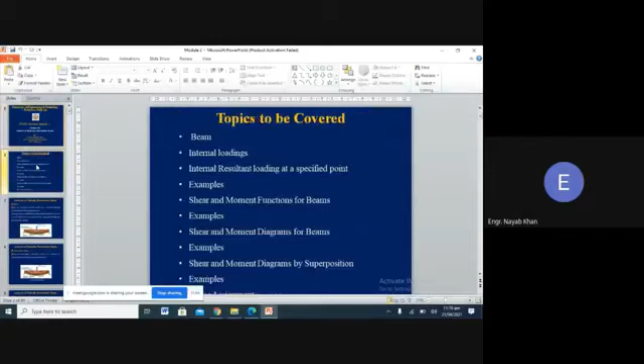Today we will discuss the internal loadings, the internal resultant loading at a specified point. This means in today's lecture we will be discussing beams, how we will calculate the internal loadings, and how we will draw the shear force and bending moment diagrams of beams. And then in today's lecture I'll also be giving you a home assignment.

So first of all we will define beams. What are beams? Beams are actually structural members. If we start from the beginning, this is a structural member. The next thing is it is a structural member which carries transverse loading, meaning perpendicular loadings to the longitudinal axis.

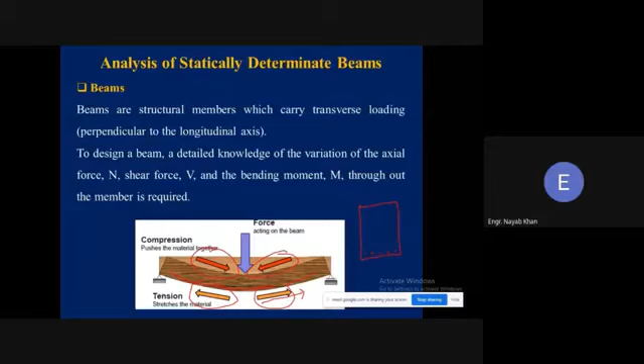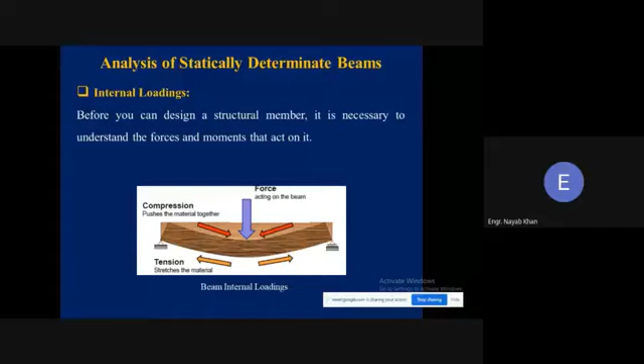This is what I have explained in the previous slides as well. So before designing a structural member, it is necessary to understand the forces and the moments that come over it, and the effects of those forces and moments.

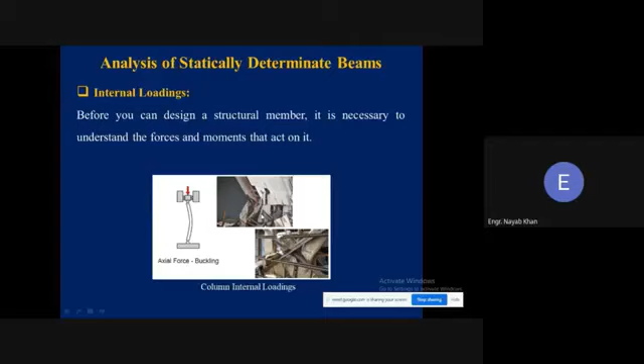And if let's suppose we have a short column, then buckling cannot occur in a short column. You will discuss this in coming semesters as well, that in short columns, the column will directly get crushed.

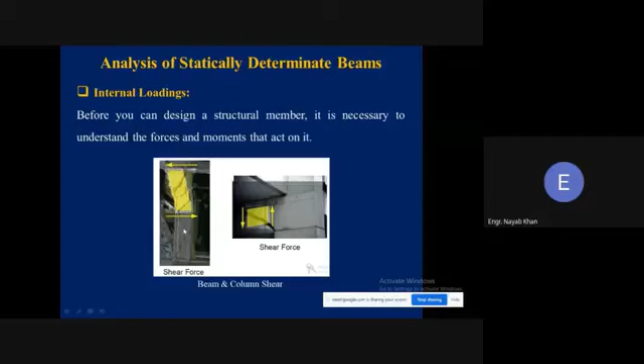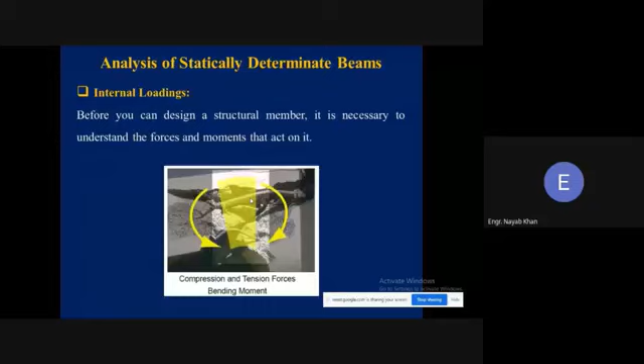So understanding these three, that is the shear, the normal force and the bending moment effect, is necessary while designing a structure. And in an analysis, what we actually do is calculate these effects in a structure.

So the internal loading at a specified point. If let's suppose we talk about internal loading at one point, then we can calculate that internal loading at this one point using the method of sections. We use the method of sections to calculate these effects.

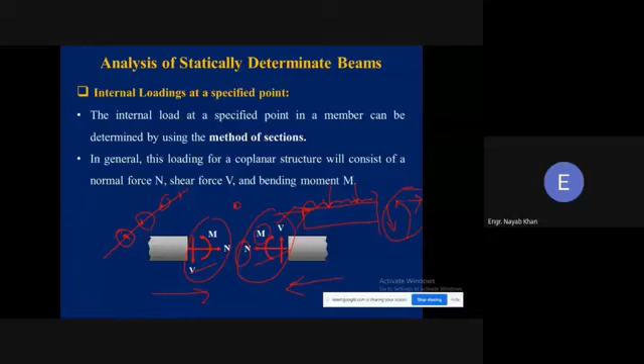So we use some sign convention. On the left hand face of the cut member, the normal force acts to the right, the internal shear force acts downward, and the moment acts counterclockwise. Suppose I am having a beam like this, and if I want to cut the beam at this location and analyze it from here, we'll throw away this portion and just analyze this one.

Now if we are throwing this portion and want to calculate the internal forces from this side instead, our sign convention will be different: the upward shear will be taken as positive, the clockwise moment will be taken as positive, and similarly the normal force acting to the left will be taken as positive. So this is the sign convention that we'll be using—this one and this one.

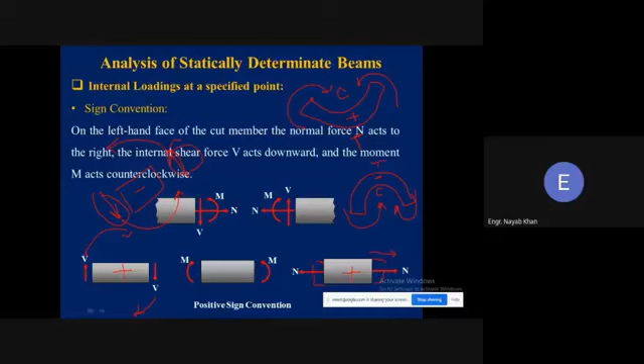Next we'll move toward the procedure for calculating the internal loading at a specified point. Let me summarize: first, we calculate the reactions at the supports. Then, once we've calculated the support reactions, we take a cut or section at the location where we need to calculate the internal loadings. There, according to our positive sign convention, we draw the shear force, moment, and normal force.

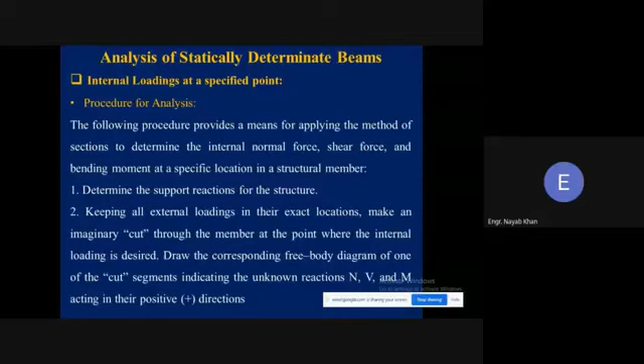We don't consider axial forces and normal forces in beams because the beam member is mostly subjected to loading in a perpendicular direction. Axial or normal loading mostly doesn't occur in beams, so that's why in a beam we usually neglect or ignore the axial effects, since the loading on the beam is actually perpendicular. So the reactions will also be perpendicular, and the normal forces as internal actions will also come out as perpendicular along with moment. That's why we only consider the internal shear and moment in case of beams.

So let's solve this example. First, we will calculate the reaction at the supports level, and similarly we will be converting this load into a point load. As it is a triangular load acting over 18 feet of length, we calculate the area of a triangle as b into h by 2.

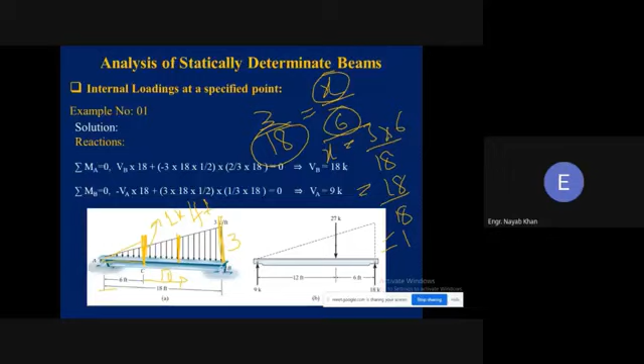Now as we are having a 6 feet portion, so for 6 feet, when we calculated using similarity of triangle, what did we get? We got 1 kip per foot loading. So we can utilize this 1 kip per foot load over here. Now you can see what we'll be doing.

We will be taking the summation of forces in the y direction equal to 0. We have 3 forces: this one, this one, and this one. Let's suppose upward forces are taken as positive, this is our sign convention. So 9 in the upward direction, the downward intensity we convert into load and take as minus, 1 into 6 divided by 2, and the downward shear VC, this will be equal to 0.

So from here we can calculate VC as 9 minus 3 equal to VC. So VC comes out to be 6 kip. So at point C, the shear force we have, how much is it? That is 6 kip.

Now we can calculate the moment at this location, the moment at the cut section. Let's suppose we are taking summation of moment at the cut equal to 0, and let's assume that the counterclockwise moments are taken as positive.

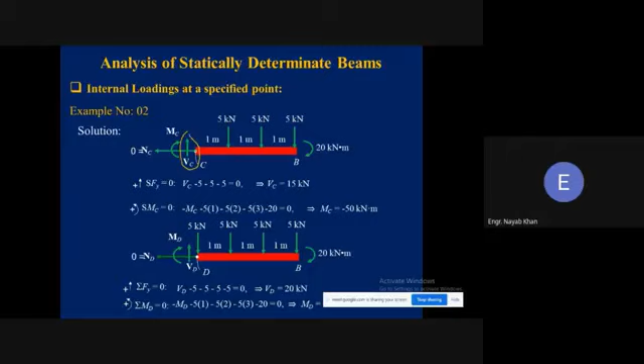Now you can see we have how many loadings? We have VC in an upward direction, positive convention के मुताबिक, 5 kilonewton in a downward direction, 5 kilonewton, 5 kilonewton forces in a downward direction.

So we can take summation of forces in the y direction equal to 0, taking upward forces as positive. So VC positive minus 5 minus 5 minus 5 equal to 0. So VC comes out to be 15 kilonewton at point C. So the shear at point C is 15 kilonewton.

Similarly, we can calculate the moment at point C by taking the moment at the cut section equal to 0. We assume that counterclockwise moment is positive. So the applied MC is negative now because it is clockwise. Our assumption is that we'll be taking counterclockwise moment as positive.

This force is also causing a clockwise moment, and this force is also causing a clockwise moment. How much will be the moment caused due to this force? 5 into 1. How much will be the moment caused by this force times this perpendicular distance, which is 2 meter. Similarly, the moment due to this will be 5 into 3. And this applied moment of 20 kilonewton. So we get MC as minus 50.

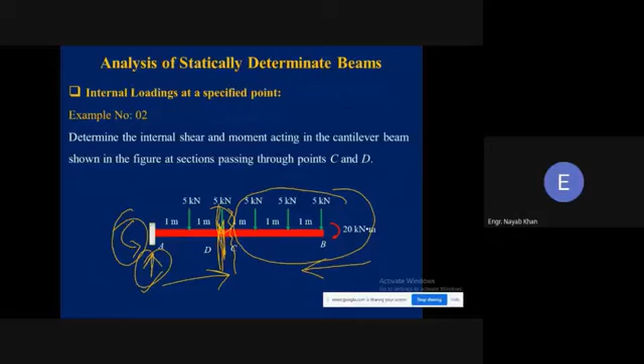And similarly you can do it for section D as well. But what will we have at section D? How many loadings will come at section D? At section D we will be having, section D is at this location. At this location there is a load applied at point D of 5 kilonewton. This load will not cause any moment because the line of action of this point and point D is the same, but this will contribute to the shear.

So in shear force we will have this load, this load, this load and this load. And similarly we can calculate the moment because of this load, this load, this load, and summing up this one moment with that. Is this clear? Can you do it?

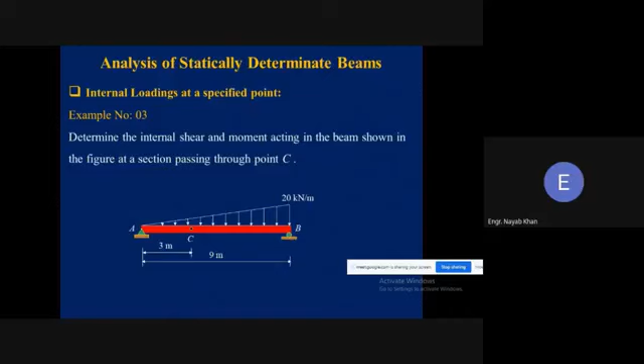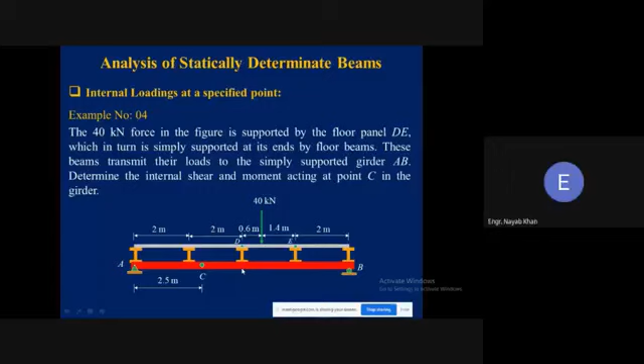So now we will be doing this thing. As you can see over here, we can calculate the reactions at the beam level due to this 40 kilonewton load acting over here. You can calculate, let's call it RD, as this is point D and this is point E. So first calculate the reaction due to these loads, 1.4 meter.

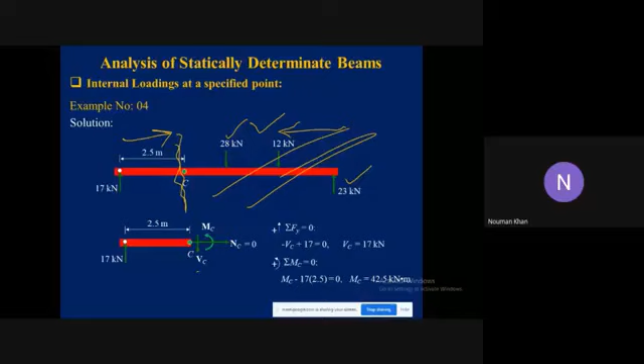So let's move toward the shear and moment functions. How are we going to derive the shear?

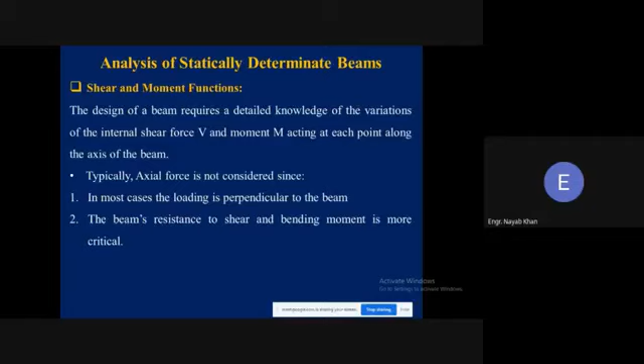The design of beams requires a detailed knowledge of the variation of internal shear and bending moment. This is a very important requirement in design. Typically what we'll be doing is calculating the shear and moment function for any structure, and accordingly we will design our structure. So the shear or moment diagram, or the variation of shear and moment with respect to the length, is important. We will be doing this directly as well as by the method of sections.

The variation of shear or moment can be written as a function of position x. We will give x different values and then we'll be able to calculate the shear and moment at these locations. X will simply be a distance.

In general, the internal shear and moment function will be discontinuous, or their slopes will be discontinuous, at the points where the type or magnitude of the distributed load is changing.

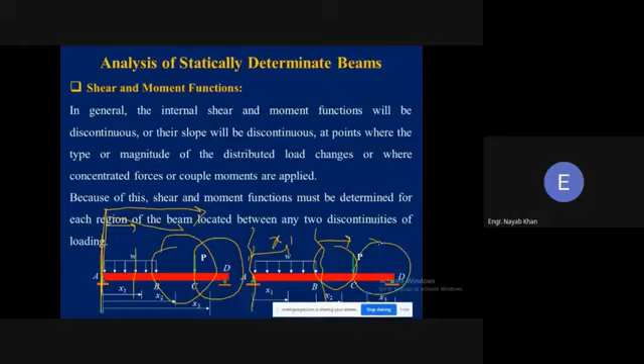So it depends on you. The coordinates x1 and x2 will be used to describe the variation of the moment and shear throughout the length of the beam.

So let's discuss this example. Determine the shear and moment in the beam shown in the figure as a function of x.

You are given with one x, and you are required to calculate the equation of the shear and moment at this location in terms of x. This is exactly similar to what we have done before.

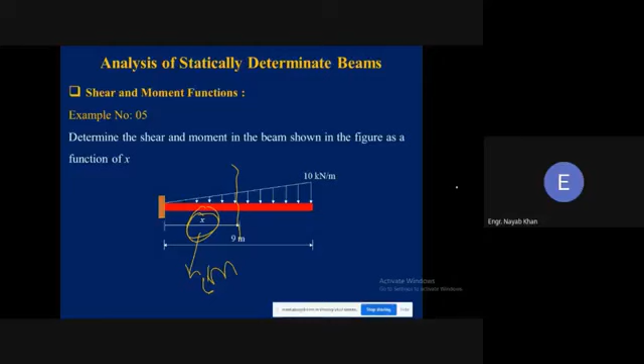We will be taking one section at this cantilever portion because the loading condition is the same throughout the beam. So first we will calculate the reactions in the same way, using summation of moments and summation of forces. After calculating the reactions, we will take this section.

When we take this section, we will have to calculate the shear and moment in terms of x. Let's suppose we take summation of forces in the y direction. You can see this distance is x, where we are going to take the section, and the total distance is 9 meters.

So if there is a 10 kilonewton intensity over a 9 meter distance, then there will be a certain intensity over an x meter distance. So here the intensity of the loading will be 10x divided by 9. This is actually the loading, 10x divided by 9, and this x is the distance.

So 10x divided by 9 is the load, multiplied with the distance x divided by 2, which is actually the area, the converted area. Let me explain it again.

At a distance x, this will be 10x divided by 9 from similarity of triangles. So this one is 10x by 9, and this one is x. So the area of this will be 1 by 2 of 10x by 9 into x. And its perpendicular distance will be x by 3 from this location and 2x by 3 from this location. So now you are able to calculate the shear force and the moment at this location in terms of x.

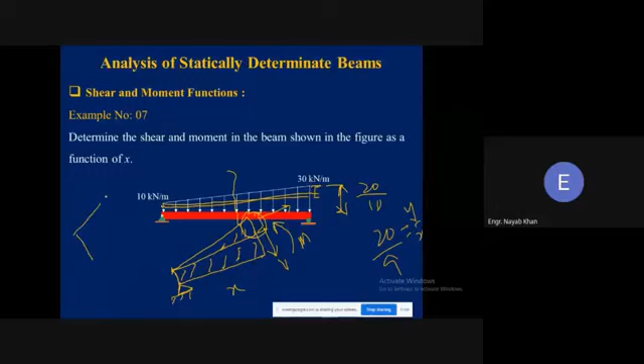So suppose I am having a 20 kilonewton intensity over a 9 meter distance. How much will be the intensity at x meter distance? This will be 20 by 9x. So the intensity of this loading is 20 divided by 9x. And the intensity of this other loading will be 10 into x - sorry, this will be the same 10 throughout.

So if I calculate the point load effect of these: this will be 20 divided by 9 into x, by 2 - that is, 1 by 2 of 20 by 9 into x into x. This comes out to be 10x squared divided by 9, and this loading will act at a distance of 2x by 3. And if I calculate the resultant force due to the other loading, this will simply be 10 into x, and this will occur at a distance of x by 2.

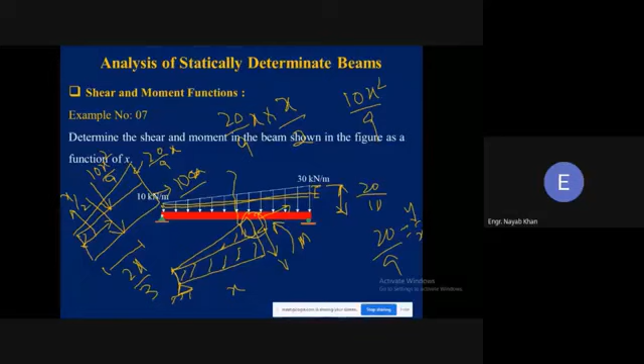So the loading is now clear. Now we can calculate the reaction at the support, the internal loading - summation of forces in the y direction. So we have this force in the y direction, that is 75. We have this force, that is 10x, and we have this force at this location. So the shear in terms of x comes out to be this one.

And hence we can calculate the moment at this location as well: that is 75 into x, since the perpendicular distance of 75 is x from this location, minus 10 into x by 2, plus this loading which I already calculated as 10x squared by 9, and this 10x squared divided by 9 will act at a distance of x by 3 from here.

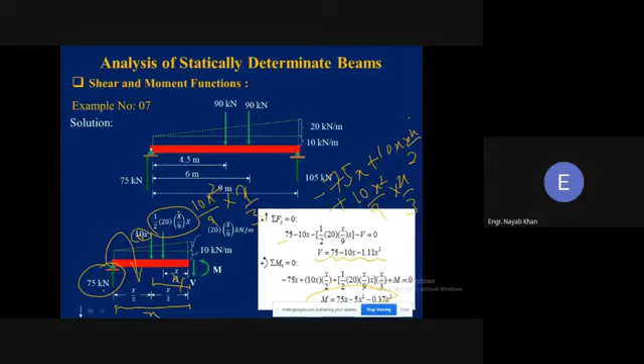75x is counterclockwise, so let's take it as negative - clockwise, sorry - minus, plus 10 into x by 2, and plus 10x squared divided by 9 into x by 3. This will give you the equation of moment at this point at a distance x. So by giving different values of x, you can calculate the shear and moment values.

Now how to draw the shear and moment diagrams for a beam?

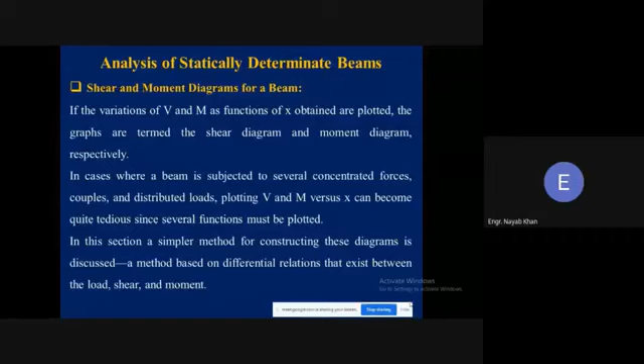So let's discuss this. Let me give you an overview of the shear and moment diagram for a beam. What will we do? We derived equations in terms of x for the shear and moment diagram. We will put values into those equations and calculate the different values of shear and moment, and then plot those values accordingly to get the shear and moment diagram.

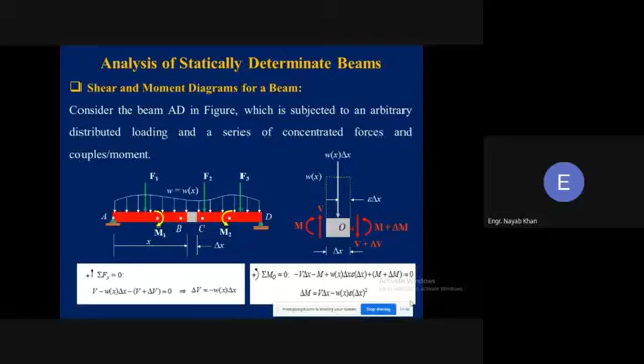Let me give an overview of what shear force is. Shear force is actually related to loading, the variation of loading, the rate of change of loading. So we can call the slope of a shear diagram as the intensity of the distributed load or any load over the beam.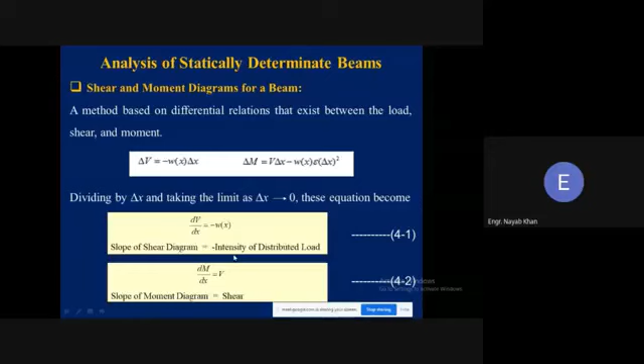So simply if we add up or subtract the loading, and if we move throughout the length, we will get a shear diagram for this. And if we calculate the areas of the shear diagram, we will get the moment. So area of the distributed load or any load is shear, and area of the shear is moment. So this is something relevant to each other. Change in the shear will be equal to the area under the distributed loading diagram.

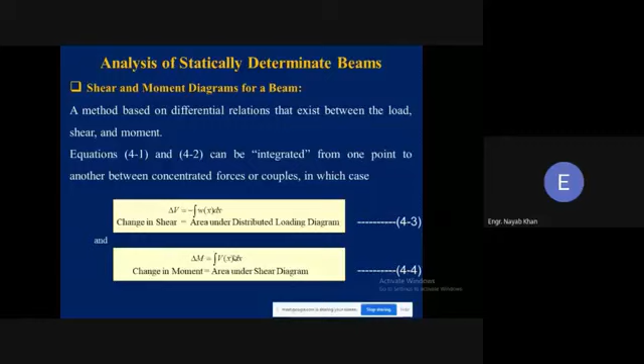When we explain the examples now, you will understand this concept - how shear is actually an area. Then similarly, change in the moment will be equal to the area under the shear diagram.

So let's suppose if a force F acts downward on a beam, delta V is negative, so the shear diagram will jump downward. So if your loading is downward, shear will also go downward.

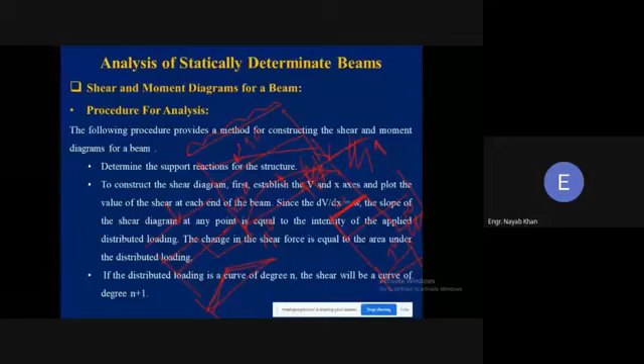So if a distributed loading is a curve of degree n, the shear will be a curve of degree n plus 1, and similarly for the moment: if your shear diagram is a curve of degree n, your moment will be a curve of degree n plus 1. So shear is related to the loading and moment is related to the shear forces.

So draw the shear force and bending moment diagram of the following beam. You can calculate the reactions for this beam, but since it is symmetric, I can take this as P and this as P. Now I will be drawing the shear and moment diagram.

The overall steps are explained over here. Let me do it directly, and you can then see the steps.

So this is the beam, and the beam is subjected to P and P, and these are the reaction forces.

Now what will be the procedure? You will be taking x at this location, x at this location, and x at this location. You will be putting different values of these lengths, and calculating the shear at this point, a shear at this point, and a shear at this point. Four values of shear you will be picking from these equations which you have written in terms of x.

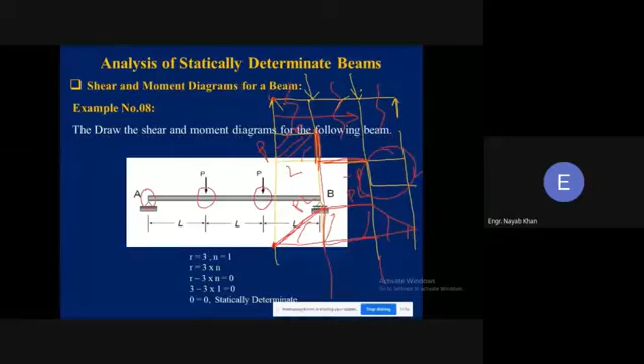Or you can do it using the same X distances, taking different sections over here, over here, over here, calculating the values of shear and moment at each location, and plotting these values, you will get the same diagram. This is a very easy example of drawing the shear force and bending moment diagram.

So the shape of the shear force and bending moment diagram will vary for different loadings. You can see like this, and you will experience this in the examples as well, so no need of wasting time on this.

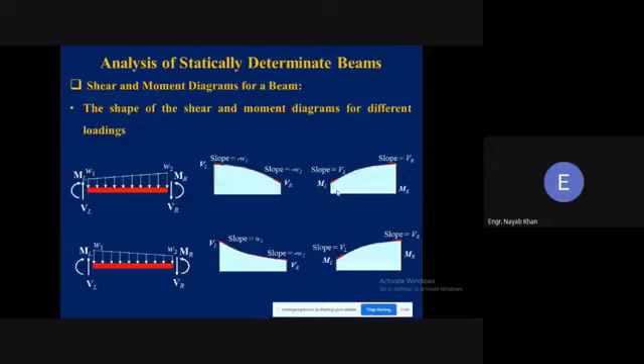So draw the shear and moment diagram for each of the beams shown in the figure. Anyone who can draw the shear and moment diagram for the first cantilever beam?

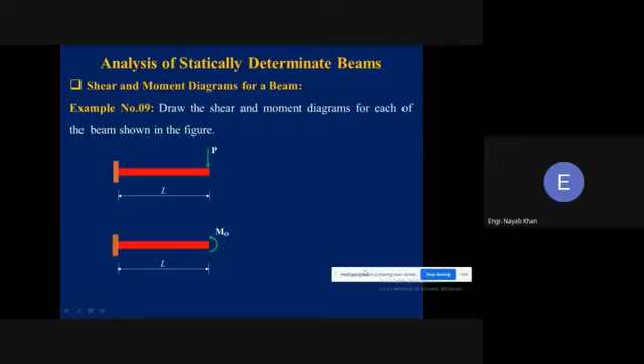I may ask any one of you to tell me how the diagram will be made. Is it done? Done, okay. So tell me how you made it. I made it ma'am.

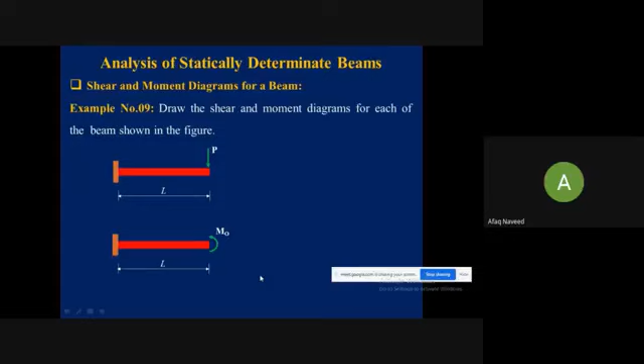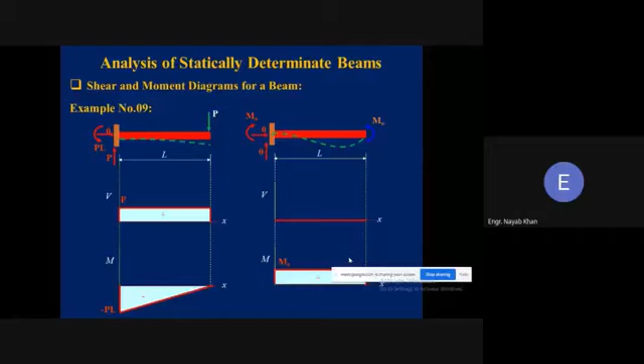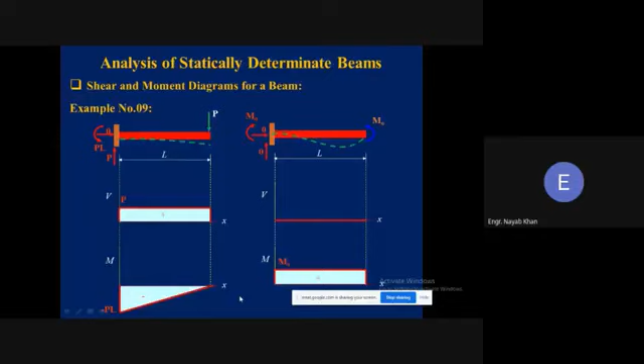Yes ma'am, okay, so this is some hands-on experience on these things. You will learn it with time, as we have already learned how to draw the shear and moment diagram. Practice these things, and let's explain example number 1.

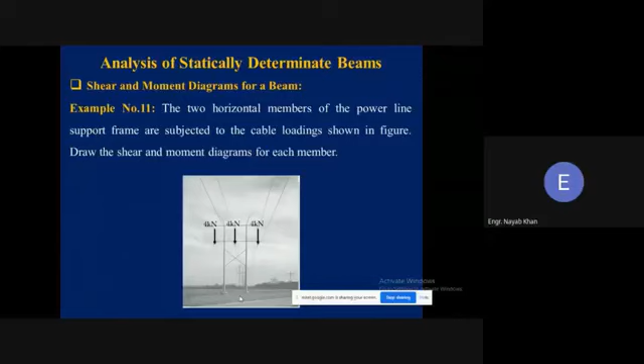In example number 11, the two horizontal members of a power line support frame are subjected to the cable loading. You can see 3 cable loadings, 4 kilonewtons on this tower, so draw the shear and moment diagram for each member. You can see over here you have 2 supports.

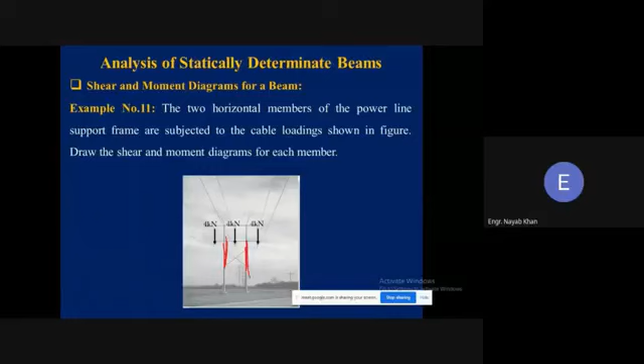You have a support over here and a support over here, and you have loading at this location, this location, this location. So you can calculate the reaction at the supports, and that will come out to be 6 kilonewton and 6 kilonewton.

Now you can use the same procedure as I already explained. Take an x at this location, x at this location, x at this location, x at this location. Calculate the shear and moment values at x is equal to 0, and at x is equal to 1.5.

Similarly, for this section, as this is x2, calculate for x2 is equal to 0 and x2 is equal to 1.5. Similarly, for the CD portion, x3, calculate the value for x3 is equal to 0 and x3 is equal to 1.5, and similar goes for x4. So you will get the shear and moment values at each location.

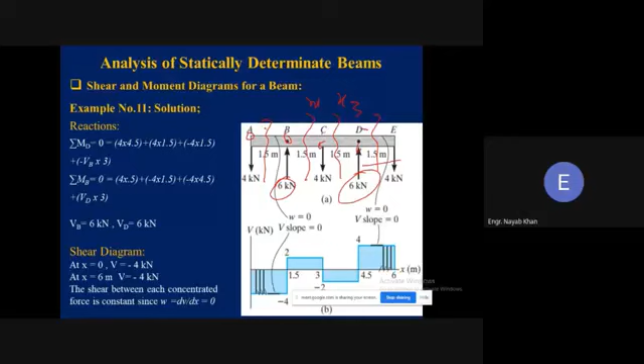Then what you will be doing, you will be drawing a line from each loading location, and you will be plotting your values.

If I do it directly, you can see over here I have a 4 kilonewton load acting downward, so it's a negative force, that will come downward from the x line. From here to here I have no loading, so the shear diagram will be like this.

From here I get a 6 kilonewton. So minus 4 plus 6 will give me what? Add all the forces from here to here. Minus 4 plus 6 will give me 2. So positive 2, I will move upward up to 2 kilonewton.

Then from here to here I have no loading. So add all the forces from here to here, that is minus 4 plus 6, and a downward force of minus 4. So 2 minus 4 will give me minus 2. Move downward. Similarly, no loading from here to here.

Now minus 2 plus 6, you will get 4, and you have no loading at this location. So what will come? The 4 will just move the same way, and minus 4. So this is your shear diagram.

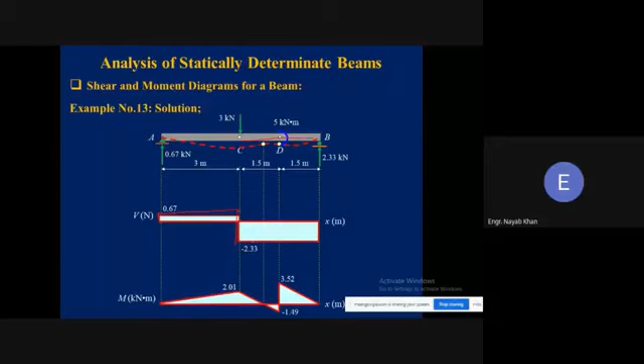That comes out to be 0.67 and 2.33. Now, 0.67 upward, there is no loading over here, then a 3 kilonewton load acting downward. So 0.67 minus 3 will give you minus 2.33. So there is no loading over here. There is a movement, but that will be incorporated in the moment diagram, not in the shear diagram.

Shear is just related to the loading. So minus 2.33, and this will be an upward load of plus 2.33. So the shear force diagram is like this. The moment diagram of this figure, the moment here is 0. So here the moment is 0. Here the moment will be the area of the shear diagram, 0.67 multiply 3. This comes out to be 2.01.

2.01, then what will you be doing? You will be calculating this area, which is minus 2.33 multiply 1.5. So 2.01 positive minus 2.33 multiply 1.5. This will give you minus 1.49.

So minus 1.49. But at this location, you can see you already have an applied 5 kilonewton meter moment. So the clockwise moment at this location, what you will be doing, you will be adding that. You can see this is a clockwise moment, so add this to minus 1.49.

So minus 1.49 plus 5, this will give you 3.52, and then calculate the area of this: minus 2.33 multiply 1.5. Subtract it from over here, and you will get 0. So you will have to incorporate the moments in moments and loads in loads. A clockwise moment will be added if the already applied load is clockwise, so you will have to add it to your answer.

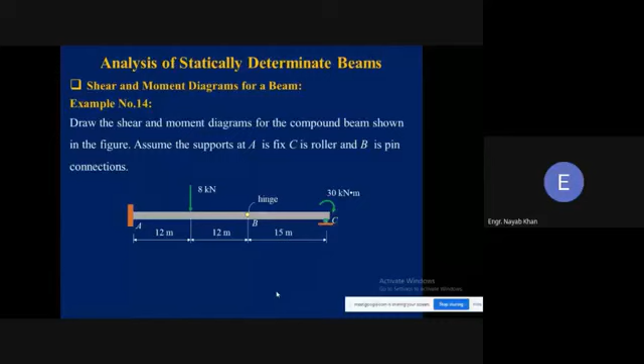If you, let's suppose we have an applied moment of 48 kilonewton and 30 kilonewton, first we'll have to draw its shear force diagram. How we will be drawing it? A shear force diagram of this: a 6 kilonewton load upward, no loading at this location, so come straight.

And an 8 kilonewton load downward, so 6 minus 8 gives minus 2, come straight, and there is no loading above. Then you have a 2 kilonewton load, so minus 2 plus 2 will give you 0. So this is the shear force diagram.

A moment diagram, I already told you a curvature like this, if a moment can cause curvature like this, this is a negative moment. So you can see over here the 48 kilonewton is a negative moment. So draw it downward, a 48 kilonewton downward at this location. Now add with this minus 48 kilonewton this area, 6 multiply 12.

So minus 48 plus 6 multiply 12, this will give you 24, positive 24, so move up. Now add this area to it: minus 2 multiply 12, so 24 minus 24. So the calculations are correct, the reactions are correct, the shear diagram is correct because we are getting a zero moment at the internal hinge.

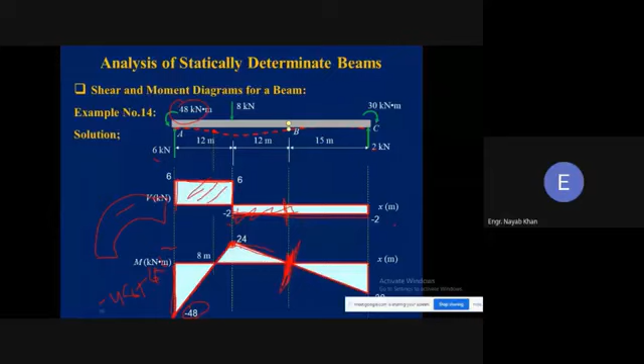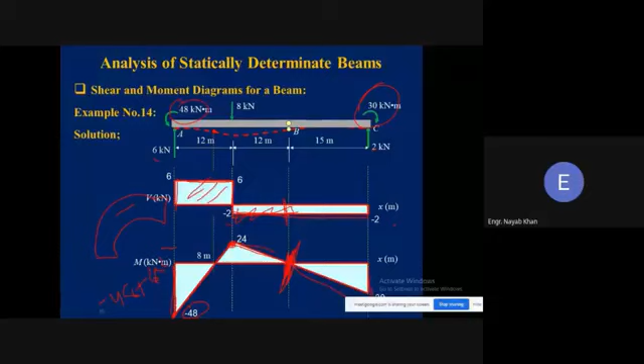Then move downward and then another applied moment of 30 kilonewton. So this is the check that you can see that your answer is correct: if there is any internal hinge, and if you are getting a moment at that internal hinge equal to 0, then you should understand that your shear force and bending moment diagram is correct. Similarly, you can draw the shear force and bending moment diagram for such type of loading as well.

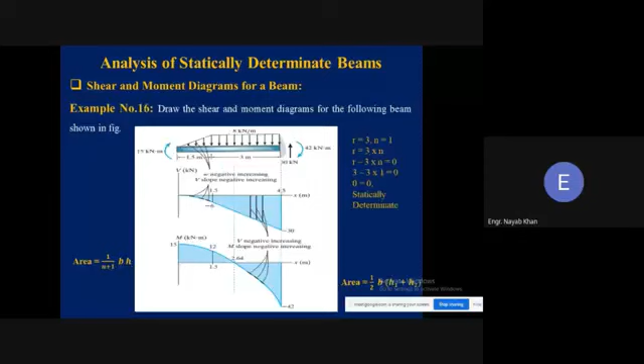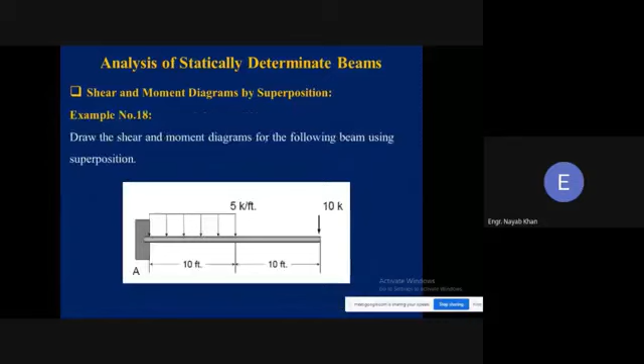So just have a look at this. Similarly, a shear force and bending moment diagram for such type of loading as well. Here you can see, and now you can draw the shear force and bending moment diagram using superposition as well.

Superposition means, let's suppose in example number 18, you have a beam and you are required to draw the shear force and bending moment diagram. If drawing it directly is not clear to you, you can draw it separately and then combine it.

Similarly, you can see the beam AB has two types of loading: point loading and distributed loading. So first draw a shear force diagram for the distributed loading, calculate the reaction at these supports, and draw the shear force and bending moment diagram for the distributed loading.

The shear force diagram will be like this, and similarly draw a shear force diagram for the 10 kip load, which will transfer over here as a 10 kip. So this will be the shear force diagram for this. Now combine both diagrams to give you the shear force and bending moment diagram collectively for the beam. This is superposition, where you add them to get the sum.

Similarly, you can draw its moment diagram. Let's suppose you want to draw the moment diagram here. The moment is negative minus 250, so this will give us a zero moment at this location as there will be no moment over here.

Similarly, you can draw a moment diagram for the 10 kip load, as there will be 10 multiplied by 20, giving 200 kip-foot moment over here. So 200, and here the moment will be 0. This is the moment diagram.

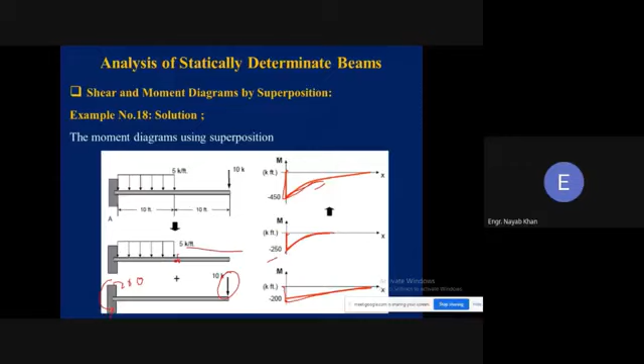You can add them together like this. Up till here you have the distributed loading diagram, and then this. So this is the moment and shear diagram using superposition.

Similarly, who can tell me how many diagrams we will draw for this one, and how many diagrams we will superpose for such beams? Let me ask from you. No one answers?

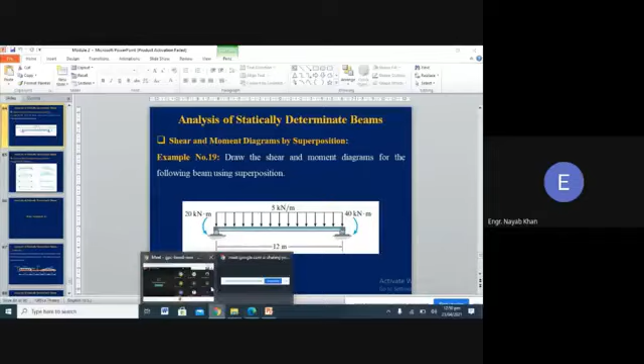Let me ask someone else. Osman Ali, you tell me. Osman Ali, are you asleep? Osman Ali... so inform him. Muhammad Saeed, yes ma'am, a very good student of my class.

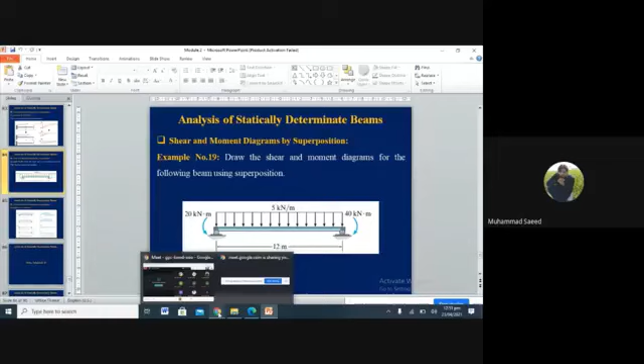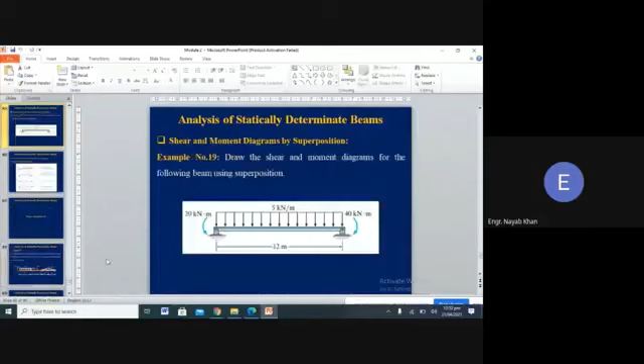We will be superimposing, or you can say superimposing the moment due to this 20 kilonewton, a 40 kilonewton, and this 5. So 3 loading conditions, yes ma'am, summing up 3 loading conditions to calculate, or to get, the required shear force and bending moment diagram.

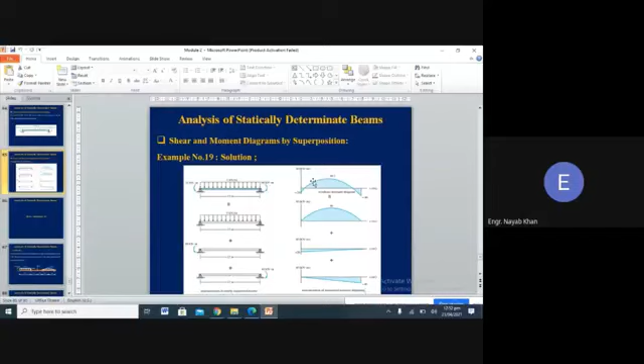At this stage, I hope you will be able to draw the shear force and bending moment diagram for a distributed loading, and I hope you will be able to draw the shear force and bending moment diagram for applied moments. So summing them together, you will get the shear force and bending moment diagram for this beam.

We have two types of loading conditions. You may get two types of loading condition. One is the one-way condition and the other one is the two-way condition of loading. In one-way condition, what happens?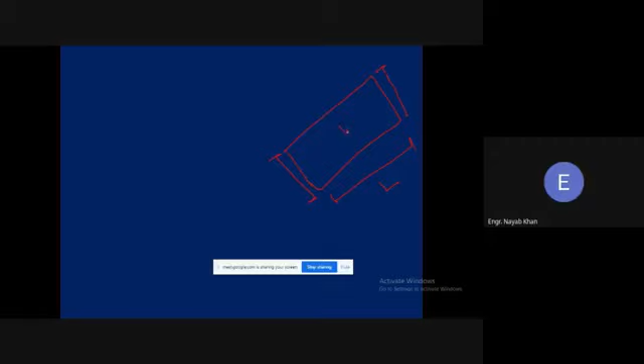If the slab is a one-way slab, let's suppose one-way slab means the slab is somewhat like this, that the shorter direction is very small and the longer direction is very large, meaning it's something rectangular. So what happens if loading comes on the slab? This slab loading will cause a movement in the shorter direction, a net movement in the shorter direction.

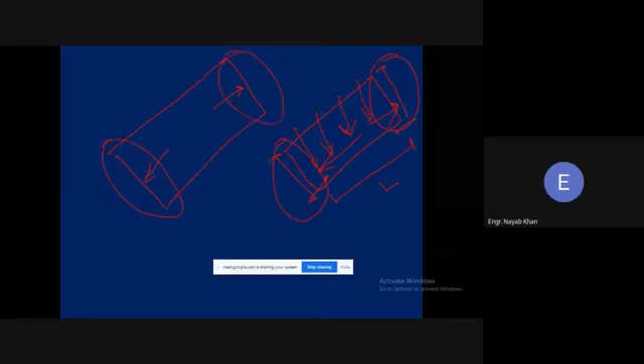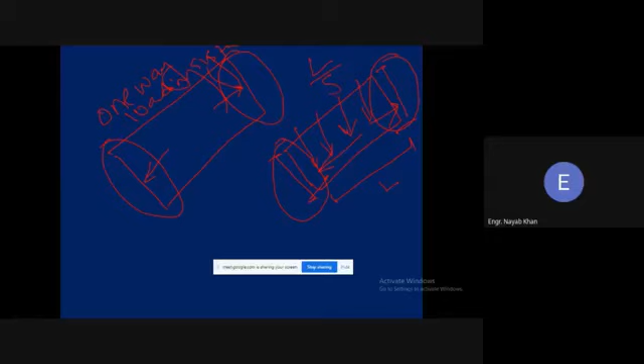One-way loading system. This is something you will discuss in detail in your RCD courses, not here, but since you asked the question, I'm giving you an idea. Just remember: if the slab is rectangular, and the longer side to shorter side length ratio is greater than 2, you classify that slab system as a one-way slab system. In a one-way slab system, all the loads of the slab will be transferred to the shorter beams, and we call it a one-way loading condition.

Similarly, if you have a square, or a slab with a longer side to shorter side ratio between 1 and 2, then whatever loading you apply, that loading will shift toward all the beams on all sides. Because of this, bending effects will occur on both the longer and shorter sides. So we call this a two-way action, because the loading will move in both directions, this way and that way. This is related to two-way action or two-way loading condition.

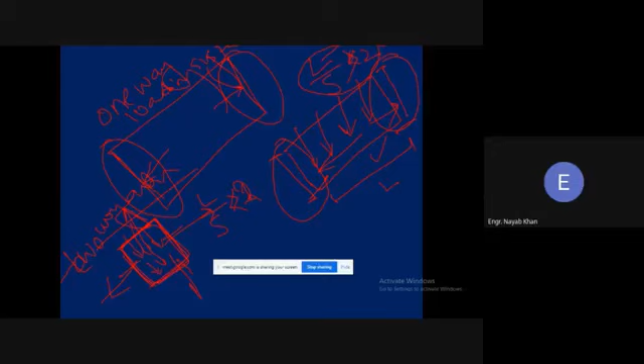So this is something related to slabs, which you will discuss in your RCD courses. This is just general information regarding one-way and two-way loading conditions: in a one-way loading condition, all the movement and loads move toward the shorter beams, and in a two-way loading condition, all four side beams will take the loads and movement. So this is related to your answer. I hope it is clear to you now.